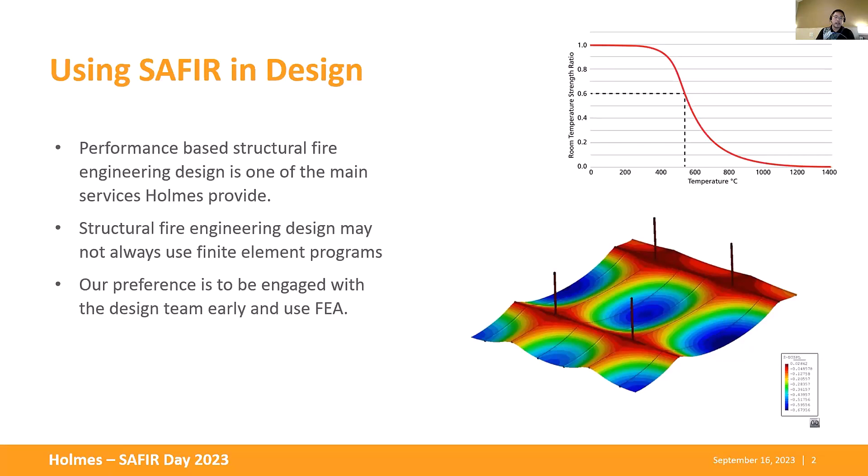But finite element analysis is something more specialized, and our preference is to be engaged with the design team early, so we can push for the finite element analysis.

The problem with using finite element analysis in design is we need to make sure the results can be reproduced. That's not only about getting the input data and running the simulation again—it's using the same parameters in the design so someone else can reproduce the results, which means the computer package needs to be robustly reviewed, peer reviewed, with enough evidence to back it up. Also, the package cannot be too easy to manipulate.

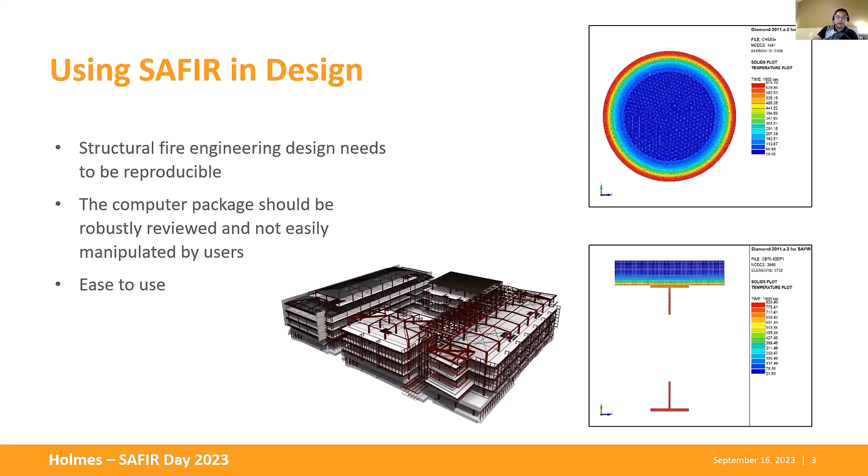There are quite a few programs out there that people can play with, like the thermal relationship, mechanical relationship in the background, and those tend to be quite difficult to peer review. If things are difficult to peer review, it will be difficult to use in design to get approval. One reason we prefer SAFIR over other programs is it's reasonably easy to use for finite element analysis. Most people here would agree SAFIR is the easier program to use, so I don't really have to sell that too much.

What I'm going to present is one of the design examples we have in New Zealand—the Dunedin Hospital, which is down south. There are two buildings, one inpatient and one outpatient. The inpatient building we are still doing analysis on at the moment. The outpatient building has been completed in terms of design and council approval. The building will be suitable to use after major disasters.

In New Zealand, that means major earthquake. This hospital is protected by a sprinkler system with dual water supplies. Under the New Zealand Building Code, even with dual water supply and basically all passive fire protection systems in place, you still have to consider what if the sprinkler system fails. That's where we came in, and the structure design is with a steel moment frame acting compositely with 170 millimeter concrete floor.

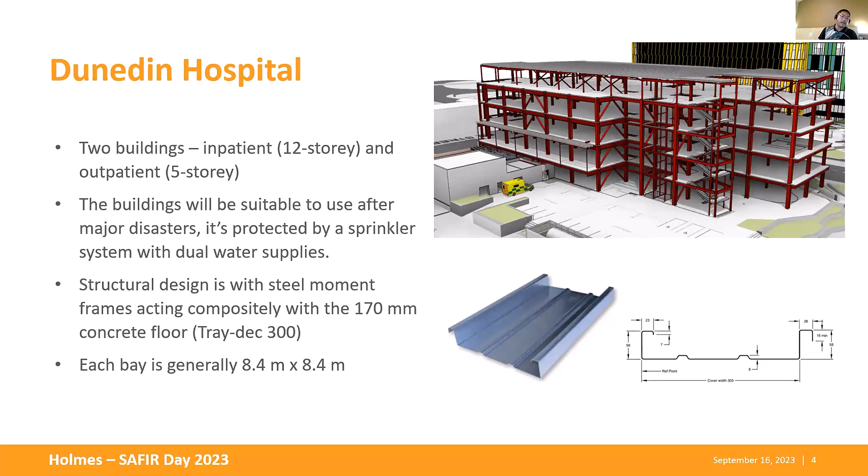The composite concrete floor uses a tray deck profile. It has a relatively flat bottom that touches the top flange quite nicely, so we won't really have a void between the top flange and the concrete. Each bay is 8.4 meters by 8.4 meters, so it's square.

For structural fire engineering design, we have to follow the same process as a fire engineering brief, like normal fire engineering design, to explain the design fire we choose. This way we can make sure, later—because running a simulation does take time—that everyone agrees the chosen design fires are representative. For hospitals, we need to think about the decay phase, so rather than just using the ISO fire, we look into the parametric fire.

The problem with parametric fire is, for example, scenario 1, which is the operation room—it doesn't have a lot of ventilation area, basically almost none. The parametric fire in the decay phase is going to be super long, which is actually quite unrealistic. The structural behavior in the decay phase is quite different from the heating phase, and that long decay phase is causing problems. But that is something we have to analyze and discuss further.

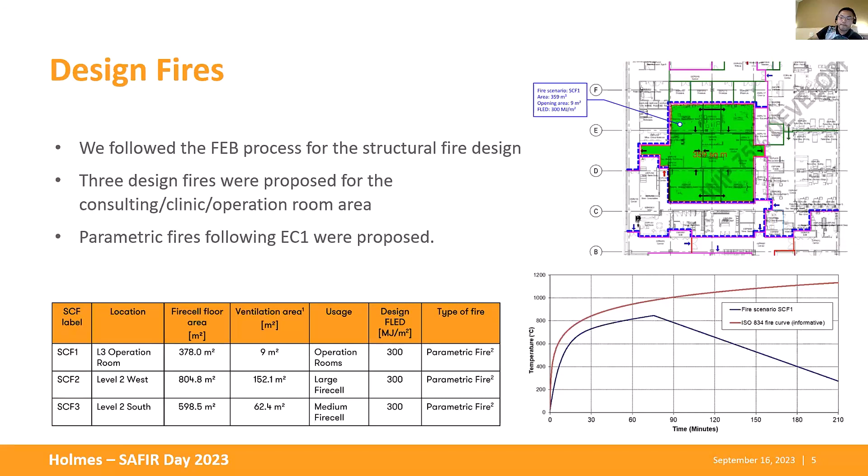The acceptance criteria - well, there's no hard restriction on the floor deflection. This took a lot of communication between us and other stakeholders, because many people don't appreciate that structural fire analysis, or when the floor deforms, happens very late into the fire, and is not really relevant to the life safety of people above the heated floor.

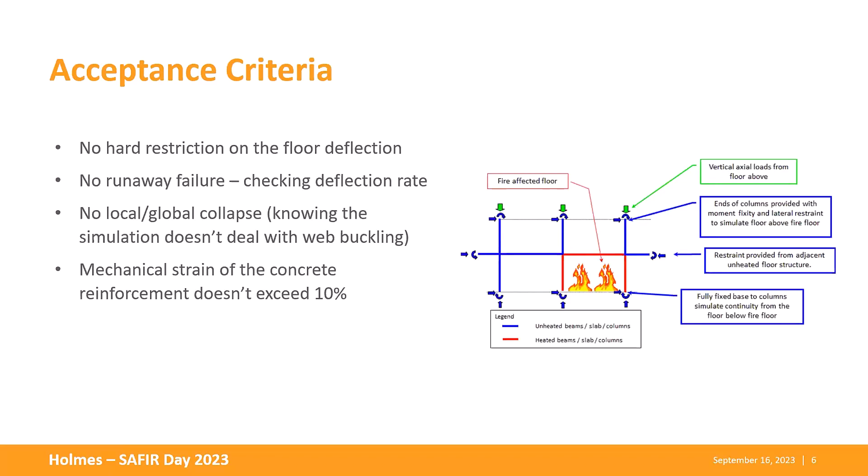So the deformation shape - we don't want the floor to collapse, but how the floor deforms has nothing to do with how people can get out from that floor. That's why we don't put a hard restriction on floor deflection, like whether it's L over 30 or L over 20. What we do need to worry about is runaway failure - we don't want local or global collapse. The mechanical strain of concrete reinforcement shouldn't exceed 10%, which is just to put some limitation on the simulation so it doesn't run indefinitely.

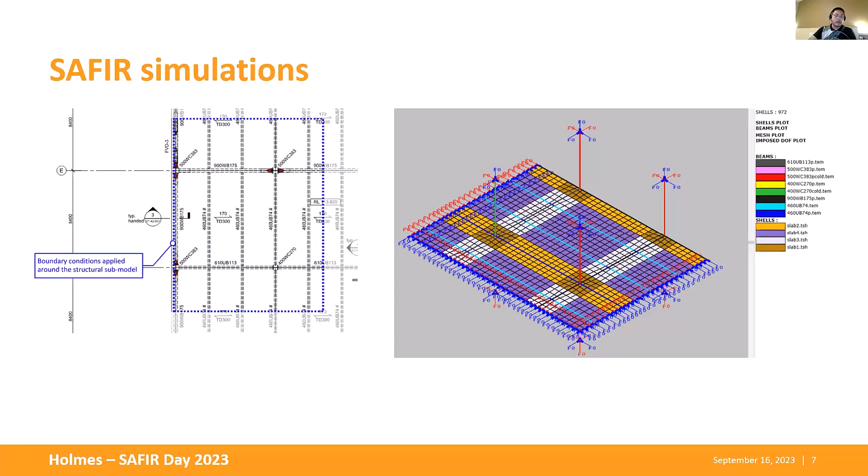This is the model we simulated, with different reinforcing bars producing different sections, and we picked a corner of the building to simulate. We did this thermal analysis for the primary beams, and also thermal analysis for the unprotected secondary beams, and thermal analysis of the shell element simulating the slab.

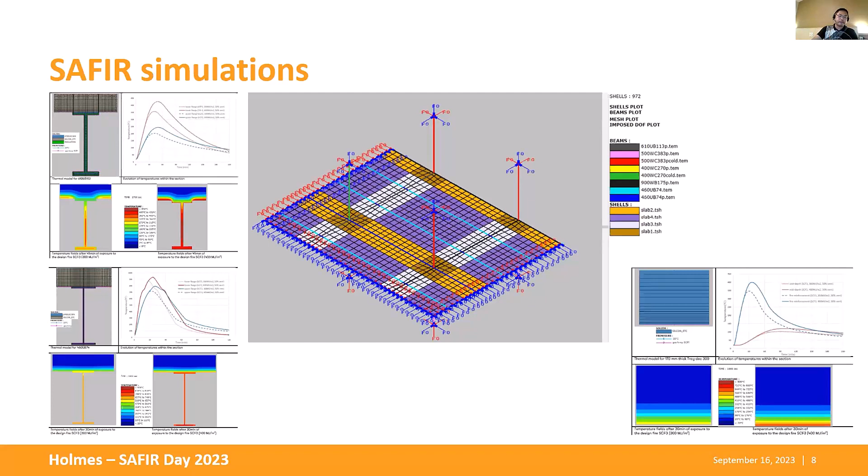The simulation results were, well, kind of as predicted. The maximum deflection happens when the temperature is high, and then it starts to come back a bit later.

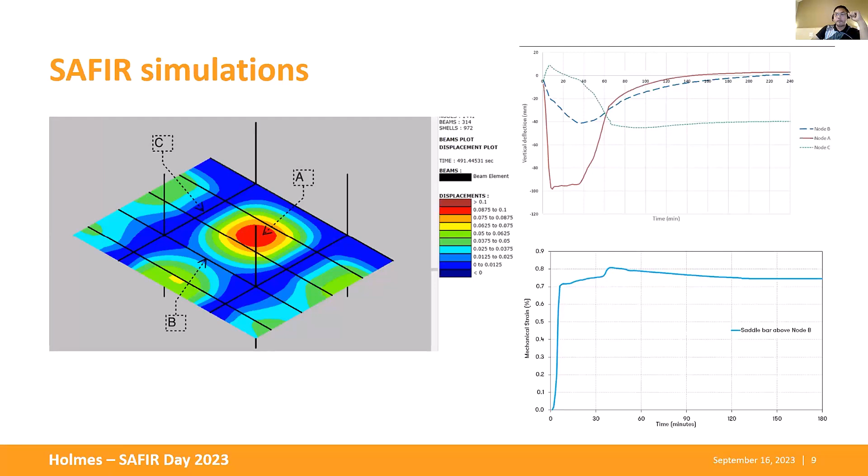Most of the secondary beams are allowed to be unprotected - that's what the client wants. Beams within 700 mil from the evacuation zone boundaries are protected, which is to appease the other stakeholders - we actually don't really need that. The primary beams and columns are protected. For all the performance structure design, we ask people to pay special attention to the connection, so the shear force can be passed into the concrete infill of the columns.

That's the example I'm giving for the design stage, and I'm passing to Linus to talk about the more interesting side about forensic investigation.

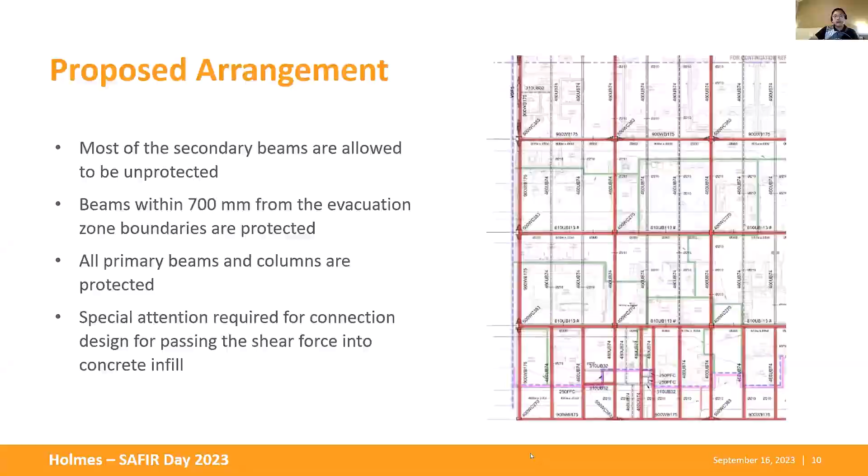Hi everyone, can you hear me? Yes Linus, thank you. Hang on - why is it not sharing? There, sharing again, sorry, I'm not used to sharing screen. Why is it not sharing? Can you see my presentation? You are sharing, you are sharing. Yes, okay, can you see my presentation?

Cool, good. So today I'm going to talk about the post-fire investigation and analysis of the New Zealand International Convention Centre fire. Some of you might have heard of this before, so apologies if it feels like a repeat, but anyway I'm just going to talk about it and try to compress it into 15 minutes.

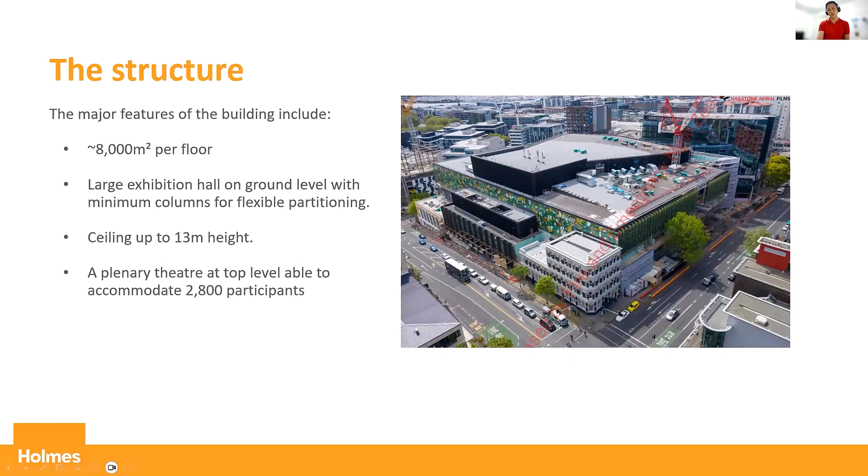The building I'm going to talk about was approaching completion in Auckland, New Zealand. This is roughly what it looks like - several stories, and each floor is about 8,000 square meters. Inside, the building was going to be used for a large exhibition hall, and here you have a theater with a ceiling height of about 13 meters, which can accommodate up to 2,800 people. Like I said, it was nearing completion, but a fire broke out in October 2019.

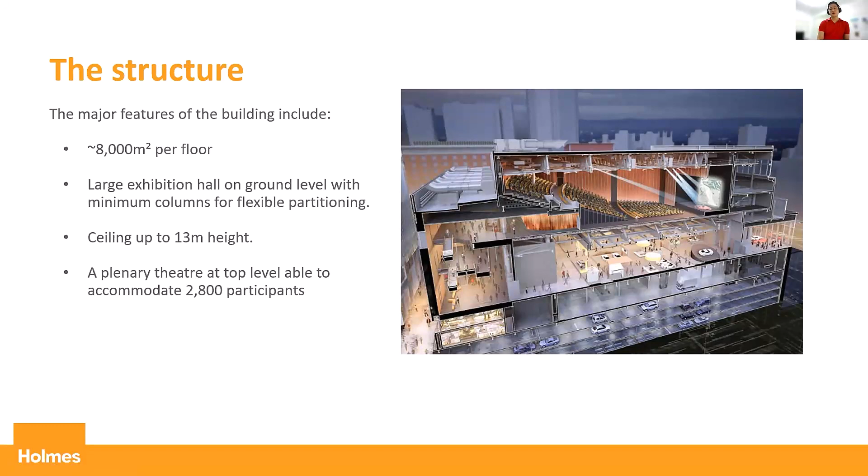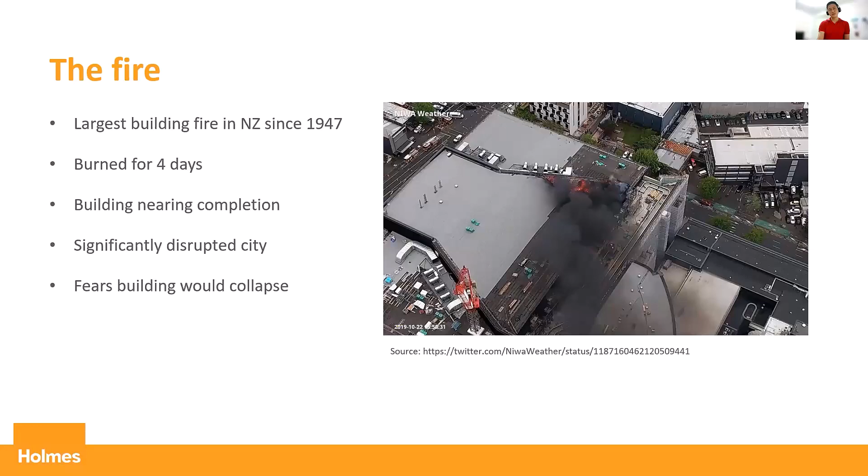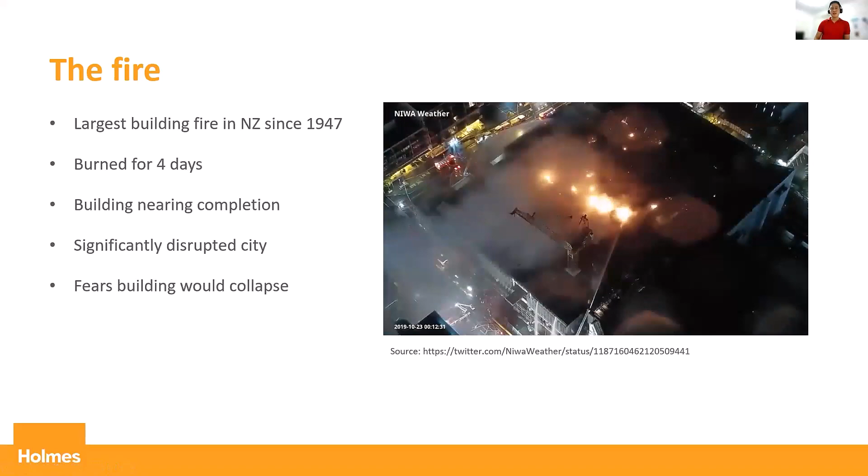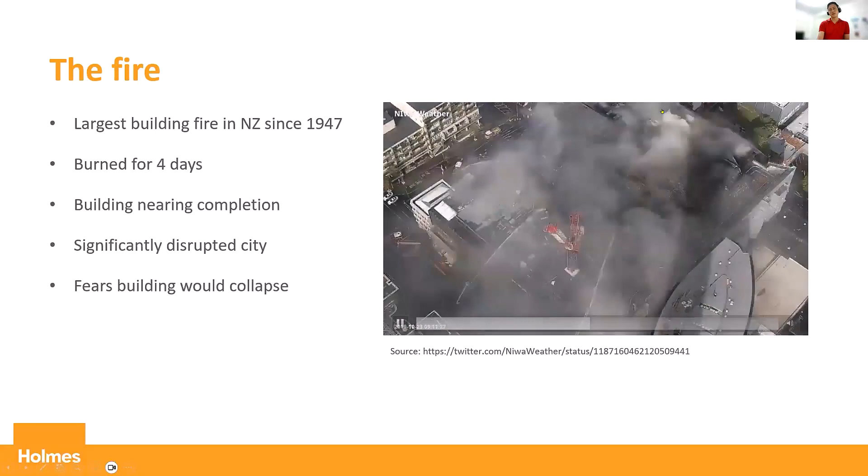This is quite a few years now. What you can see is a time lapse - conveniently there was a webcam camera located on a crane, or actually the next door building, which captured it. I'll try to run this. As you can see, it started from one side and spread across the roof, and burned for nearly 4 days before it was fully extinguished, though the main part of the fire was about 2 days. It went from the upper roof and spread to the lower roof, and people thought it had gone away, but then for some reason it starts again on the other side of the roof.

So the firefighters had a tough time putting out the fire because there were concerns about approaching it from the underside, so they had to fight it from the outside, from the street level. So anyway, that's the video.

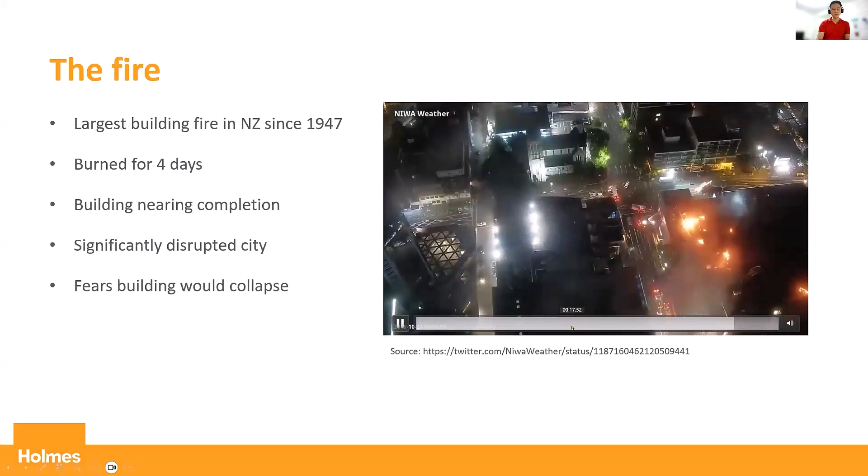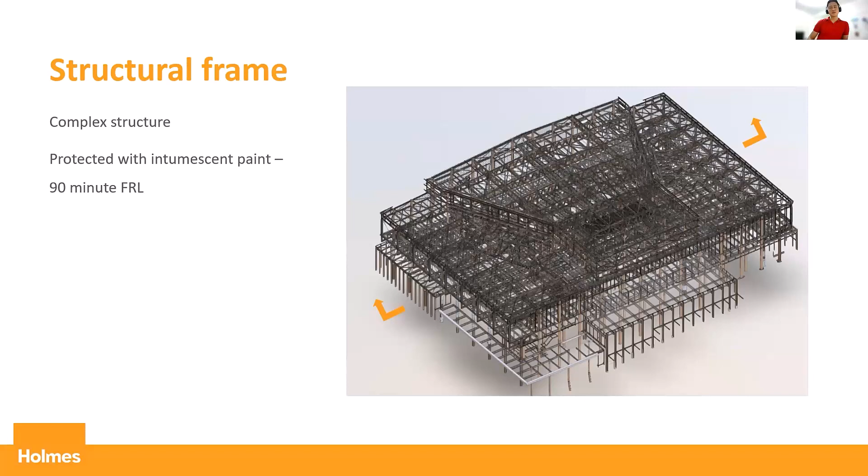So a bit about the structural system for which we did this investigation. It's a fairly complex steel frame structure, designed to resist not only gravity loads but also earthquake loading. Coincidentally, most of the steel frame structure, including the long span trusses, were protected with intumescent paint to a 90-minute fire rating.

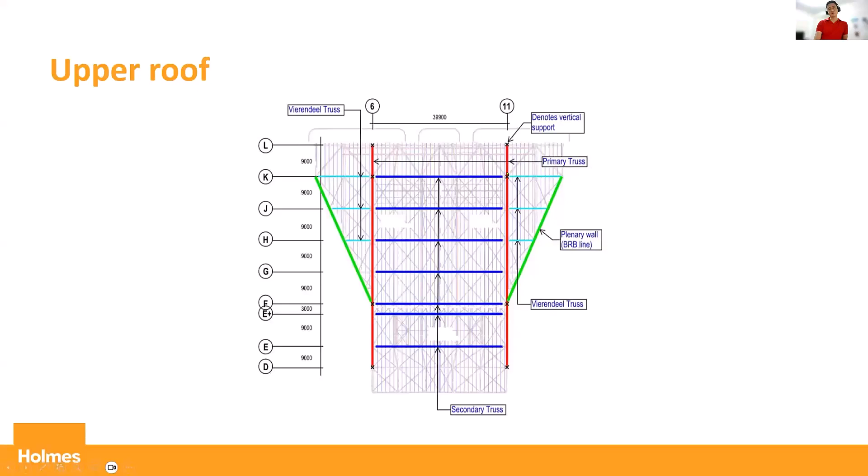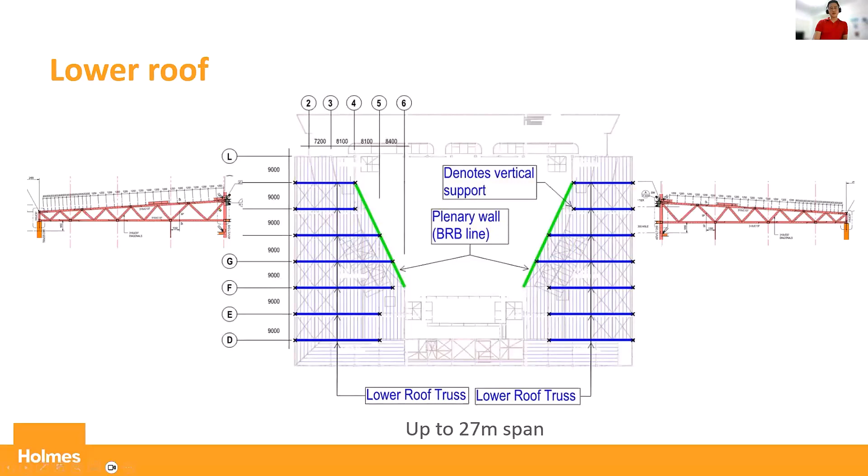There's two parts to the structure: the upper roof and the lower roof. The upper roof has blue, which is the secondary trusses, spanning about 40 meters between the red ones, which are the primary trusses. The columns are over here. The primary truss spans about 36 meters this way, and the main span is about 40 meters this way in blue. On the lower roof, the trusses span up to about 27 meters.

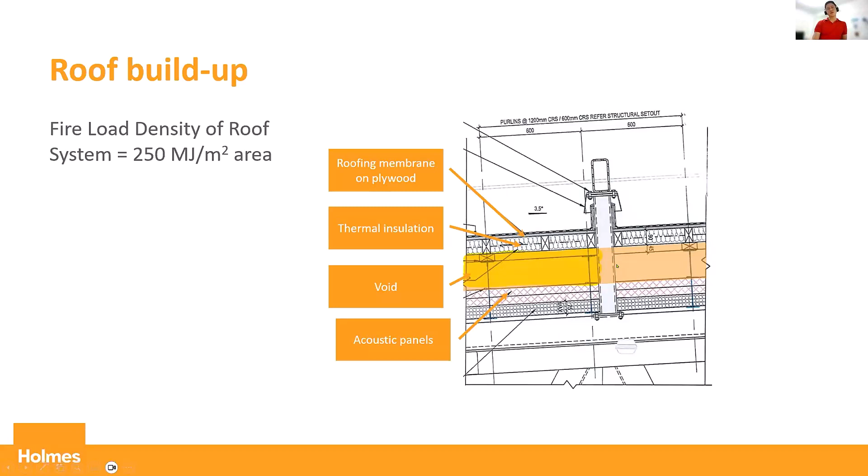What happened during the fire was that in the composition of the roof, the roofing membrane consists of a combustible layer on plywood, then thermal insulation, then a void, and acoustic panels. Someone accidentally left the heating torch when they were trying to build up the roof membrane, and it set the plywood on fire. The thermal insulation caught fire, air passed through the void, and it went through the whole roof layer. There were also prevailing winds that caused the fire to spread everywhere.

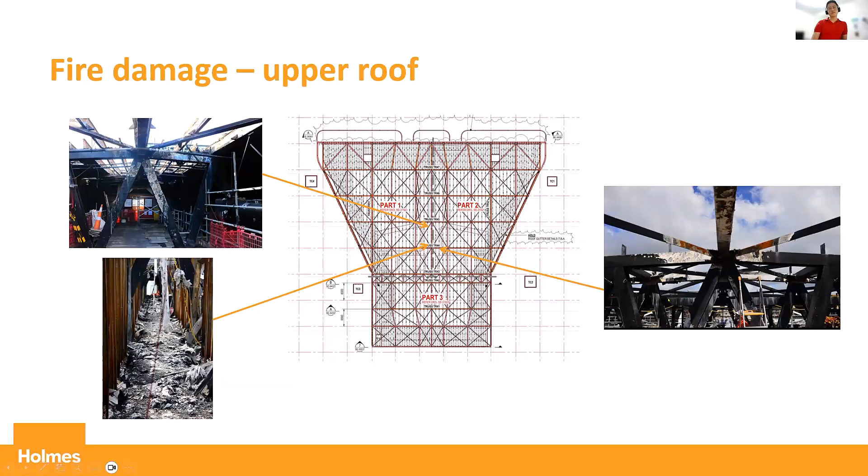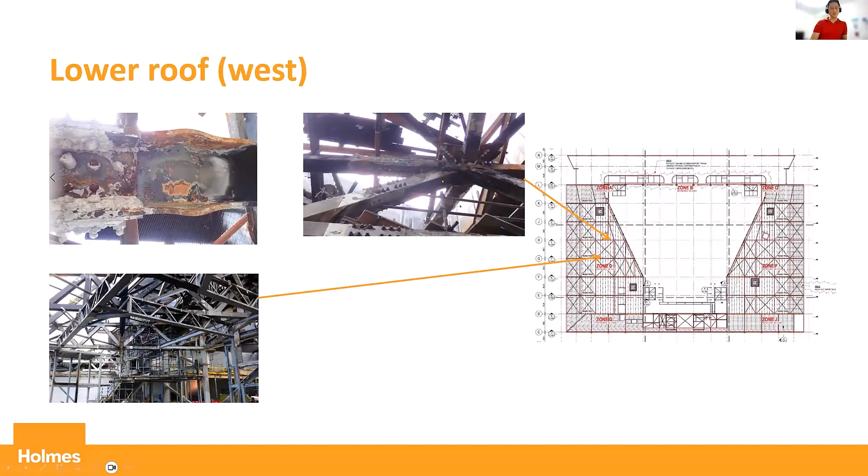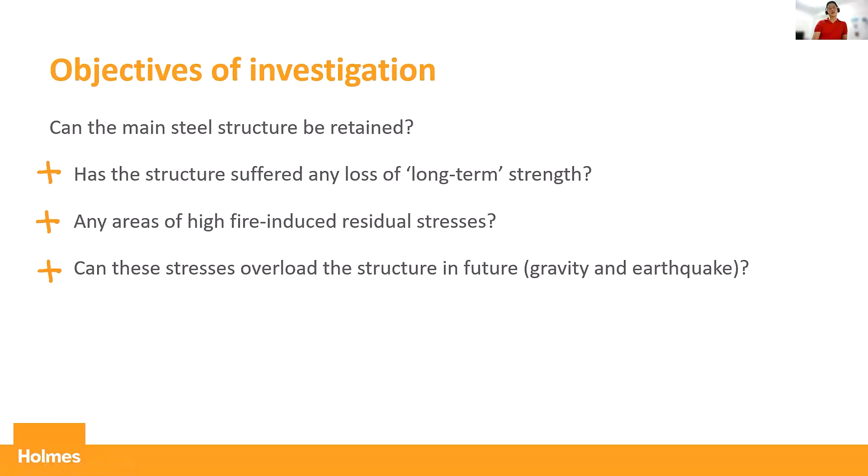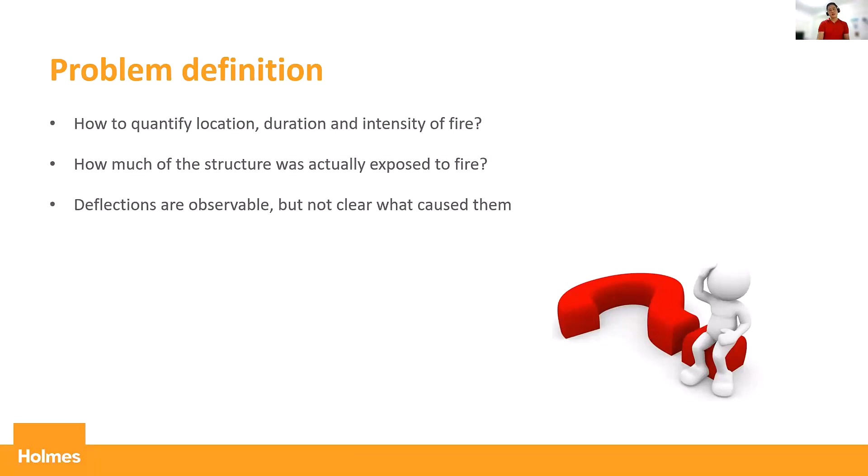So in terms of our investigation, we had to work out where the fire was, how long it burned, and its intensity, and how much of the structure was exposed to the fire. While there were some deflections, it wasn't clear at the time what caused them. Also, the challenge was that any thermally induced residual stresses due to the fire were not easily visible.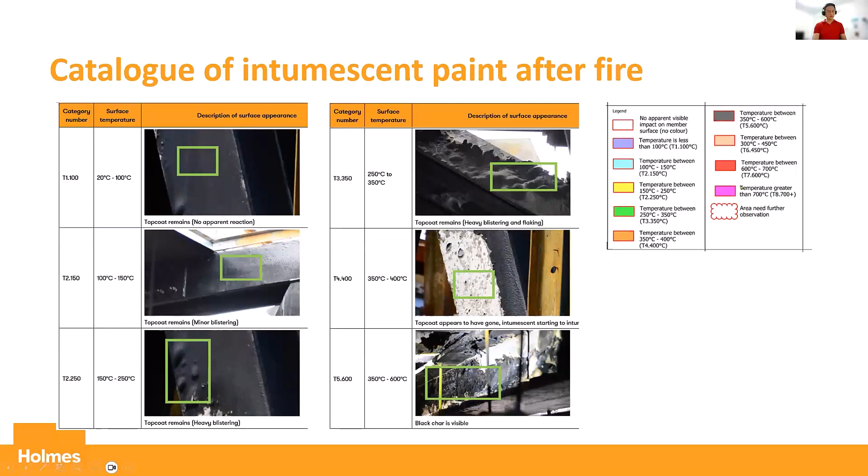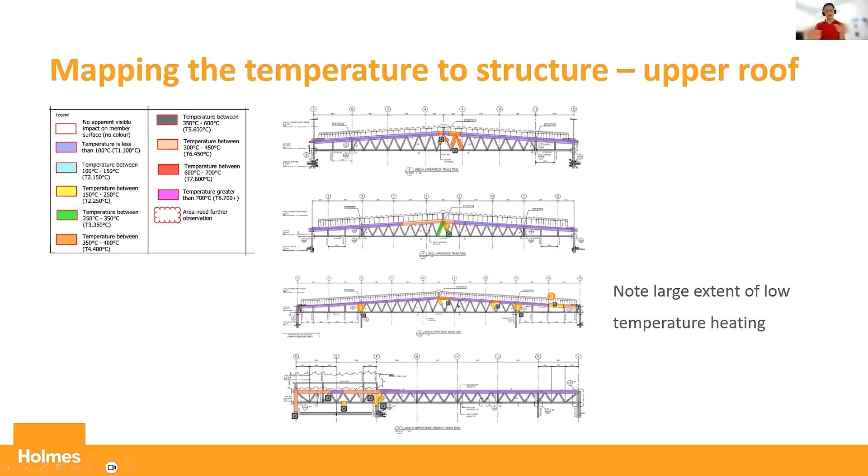We then did a whole bunch of inspections throughout the building to work out where the heating was. Purple indicates low heating, and then there are different levels of heating, orange and so on, indicating areas of much higher heating. We did this for the whole roof structure, which took quite a bit of time, obviously.

The other thing was to work out when the fire was and where the fire was. So we mapped the heating progression of the structure across the building using the webcam video. Fundamentally, the fire started to move this way, from blue to green, purple, and so on, from the northwest to the northeast, and then down south.

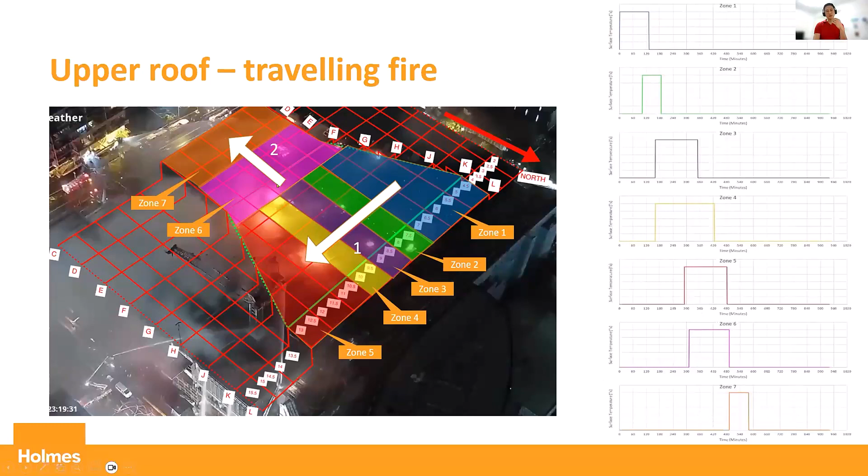So each of these regions from the CCTV footage, we could derive time-heating curves, very simple approximated curves, for each of the zones here: 1, 2, 3, 4, 5, 6, 7. And then we were able to define what the heating was.

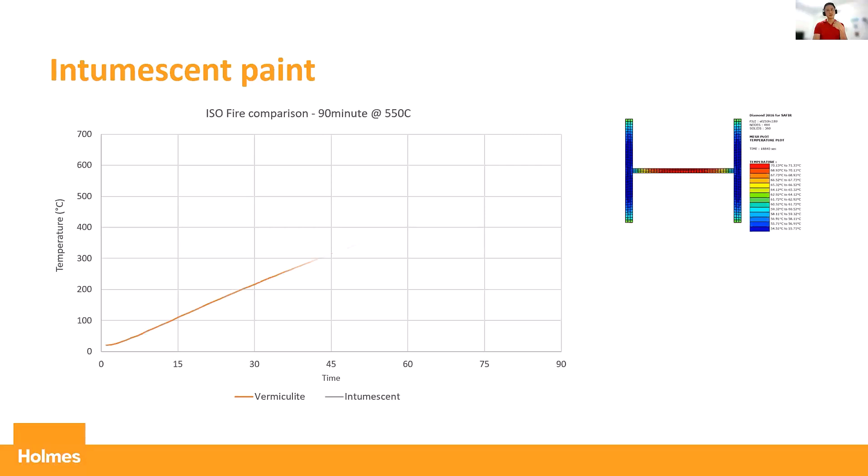One of the other things we thought we should model was the presence of the intumescent paint, which compared to vermiculite fire spray looks a bit like this. Intumescent paint has got this bilinear curve. We did a simple literature survey and worked out that the temperature is going to activate the intumescent paint a bit like this, to define a limiting temperature. If someone protects a bit of steel to a certain limiting temperature, you get a characteristic curve that looks a bit like this. So we tried to model it this way.

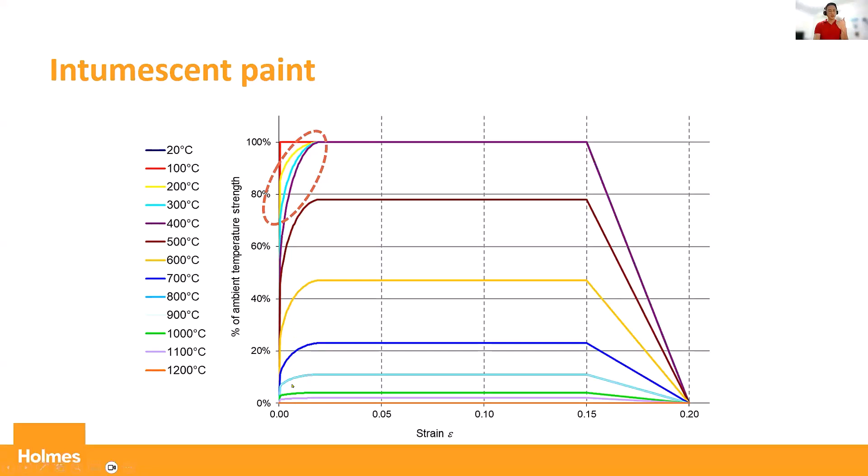The reason we modeled it this way was we wanted to capture the phenomena in the early heating zone as well, because of the influence of residual strains, particularly when you look at the stress-strain curve of steel. At 200, 300, 400 degrees Celsius, you start to get some nonlinear behavior, so when you have heating, cooling, and unloading, you get some residual strains. We wanted to make sure we picked some of that up as well.

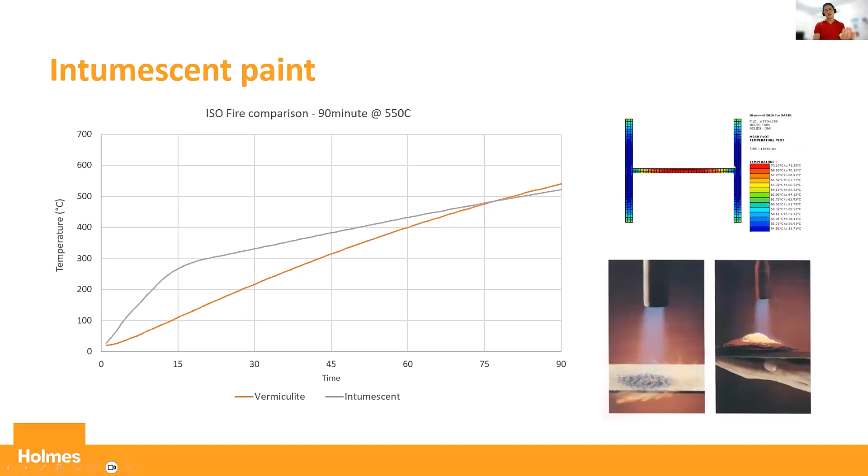So backtracking a bit: we took all the heat transfer analysis for every single different type of structural element, applying the different heating curves, temperature-time curves, and zones. We constructed a structural model that looks a bit like this, and we ran it to see how the structure responds.

If you look at the deflection at the top of the truss, it looks a bit like this orange curve here. This is the net deflection attributed to fire, so we cancel out the gravity deflection and only show the net deflections. The structure deflects upwards—this is vertical displacement as a function of time. It displaces up and then comes back down after cooling. So there's a little bit of net deflection, but very hard to see with the eye. Fundamentally, the structure is pretty much undeformed, at least over here.

In other areas, we were also able to predict the deformations, which were quite consistent with what we saw on site.

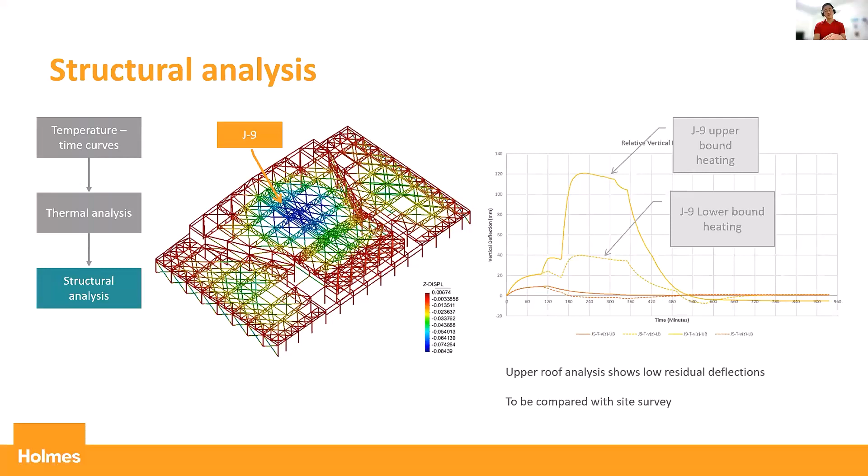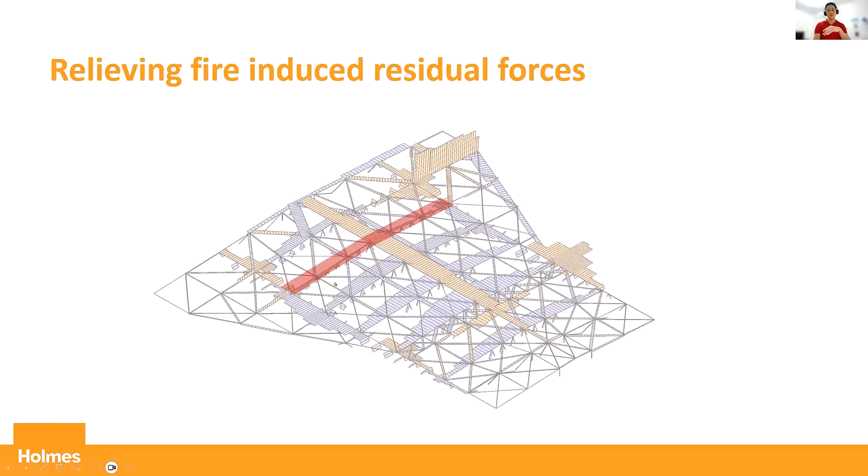One of the things I said early on was that we were trying to predict where the residual forces are. So this is the plot of the axial forces after the fire at the top chords of the roof truss—blue is compression, yellow is tension. In theory, most of the top chord should be in compression, but if you look at this one here, it's actually strangely in tension.

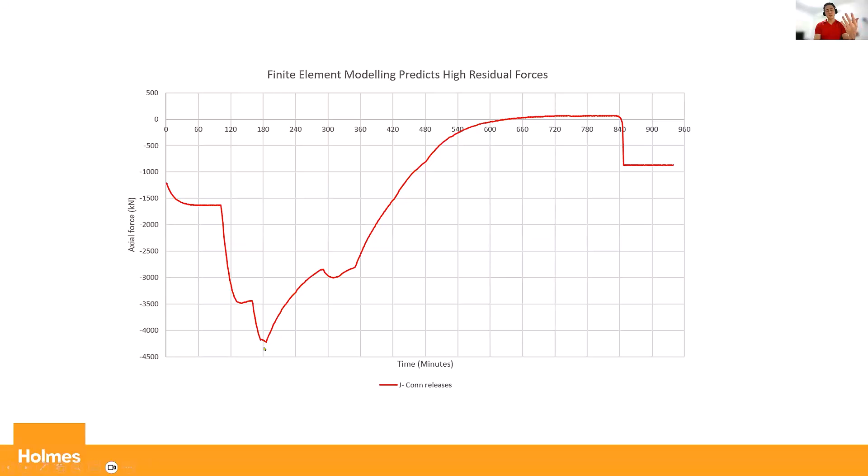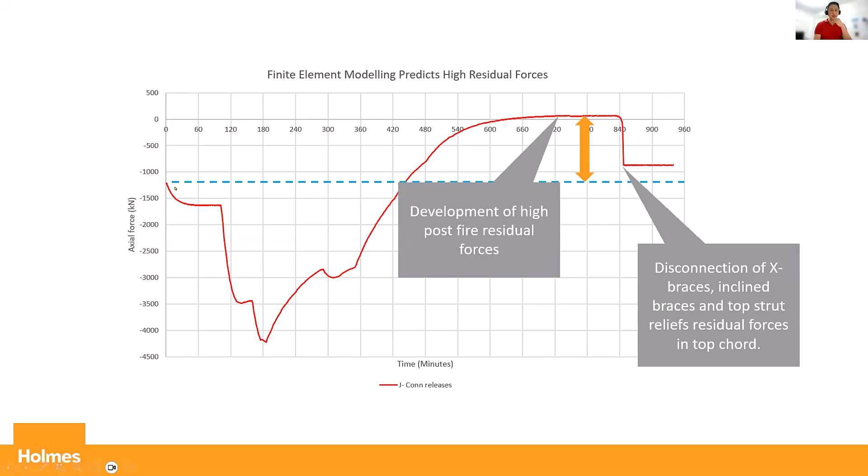If you look at the axial force at the start of the fire, it is compression, which is correct. As the fire comes along and gets hotter, the compression forces increase. But as it cools and decays, you find there's actually a difference, forming some residual forces in the top chord. We found that by disconnecting numerically the braces, we could actually relieve some of the residual forces and bring it back closer to what it should be before the fire. So all that was quite useful.

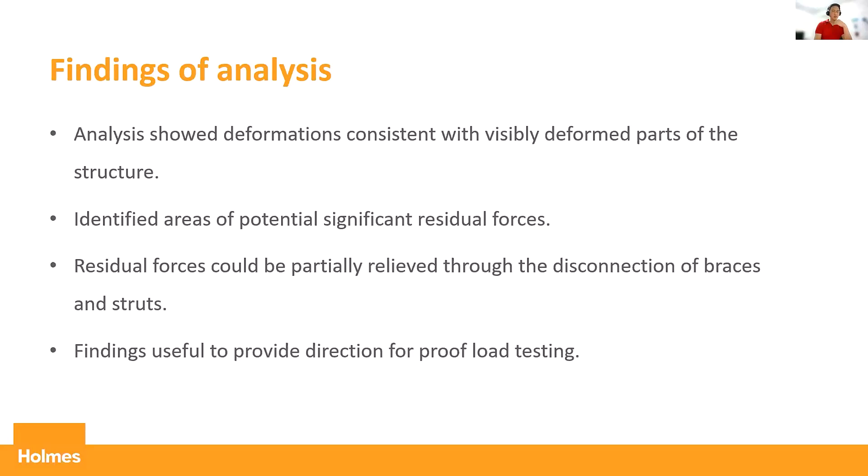In summary, we found all this information was very useful for the team in terms of rehabilitation of the structure. Fundamentally, what they ended up doing was disconnecting most of the structure, bringing it offsite, and repainting it.

I'll just show one last slide here, which is they did some proof load testing. This isn't SAFIR related, but they set up a rig—you can see these are tension rods here. They loaded some of these trusses to ultimate limit state loading to check that the structure performs elastically, which it did. This gave confidence to the design team that the structure, even the worst heated one, if they replaced one or two members, could still perform pretty elastically and take the ultimate limit state loading.

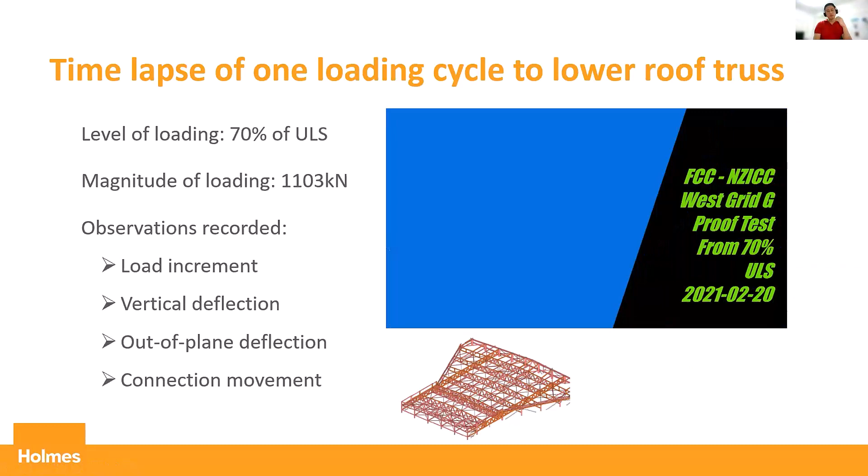Yeah, so look, I'm going to conclude my presentation here. Thank you for your time. Let me know if you have any questions.

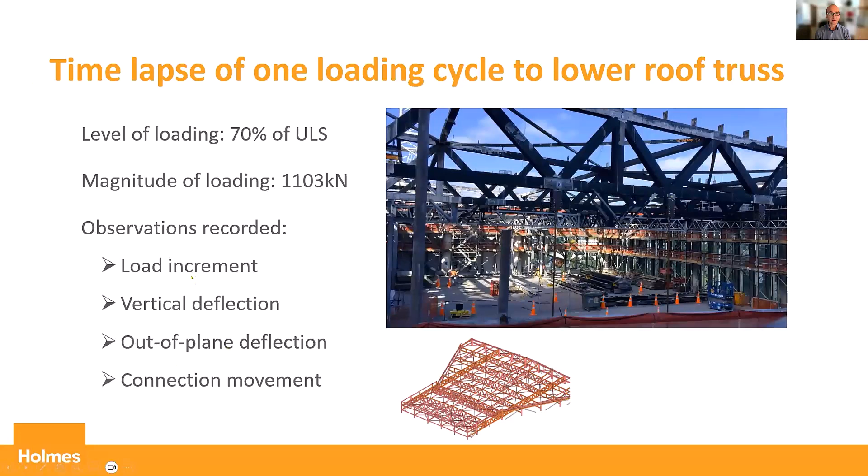So first one is for Jeremy. Can you please elaborate a little bit on the mechanical boundary conditions in your design presentation on the hospital, especially if there is lateral restraints provided by the cold parts when you were looking at the fire scenarios in the different compartments? Right, so we didn't really model the cold part.

We simulated the entire thing being, well, the whole slab being heated up by the design fire, and the boundary condition is done. We also modeled it to half of next bay. So basically the boundary condition is for symmetry. You have to restrict the lateral movement anyway, and that's what we did. So it wasn't really considering the cold part providing restriction, but more to just simulate the symmetry.

Very good, thank you. Linus, a few questions on your part as well. There were a couple of questions on the intumescent coating. So you presented a curve with the temperature, but can you elaborate a little bit on how you treated that in the thermal model, please?

Yeah, sure. We looked at the different thermal conductivities for different temperatures. So at low temperatures up to about 300 degrees Celsius, we use a high thermal conductivity. And then once we got to past 300 degrees Celsius, we use a low thermal conductivity to represent the insulative effect of the expansion of the intumescent paint.

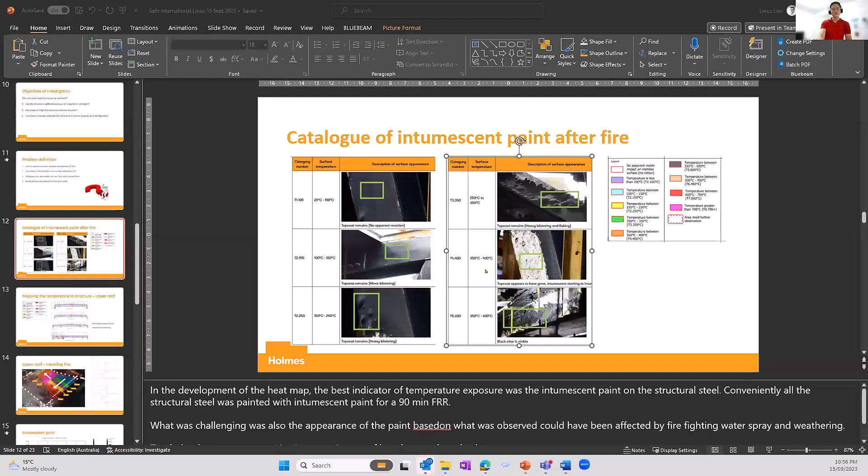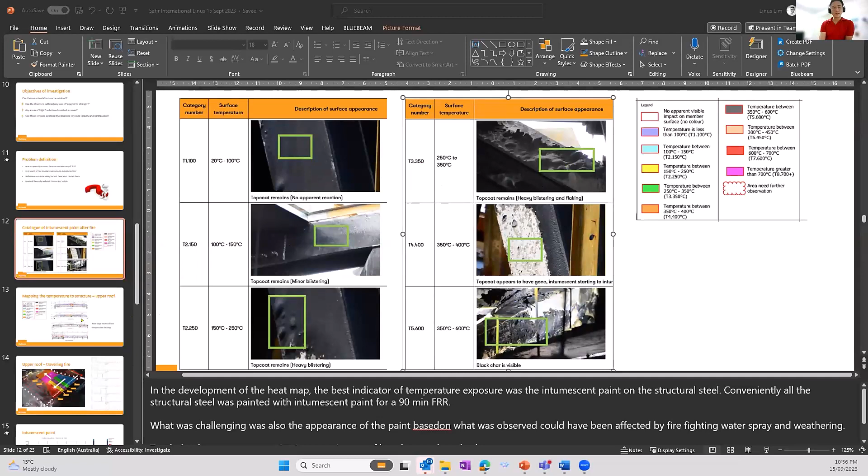Might be easier to explain. So for instance, over here, this one would have a maximum of 350 degrees Celsius. So if we find from our heat map that you've got a member exposed to that temperature, then you adjust the heating so that it would go only up to a maximum of 350 degrees Celsius.

And then this one here, it'll go a bit hotter - that would be 400 degrees Celsius. It'll go up only to a maximum of 400 degrees Celsius. So that's how we define the maximum temperature.

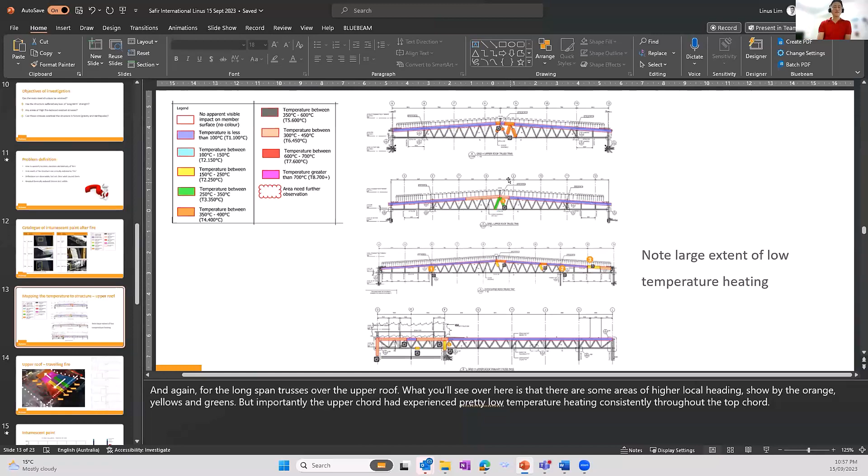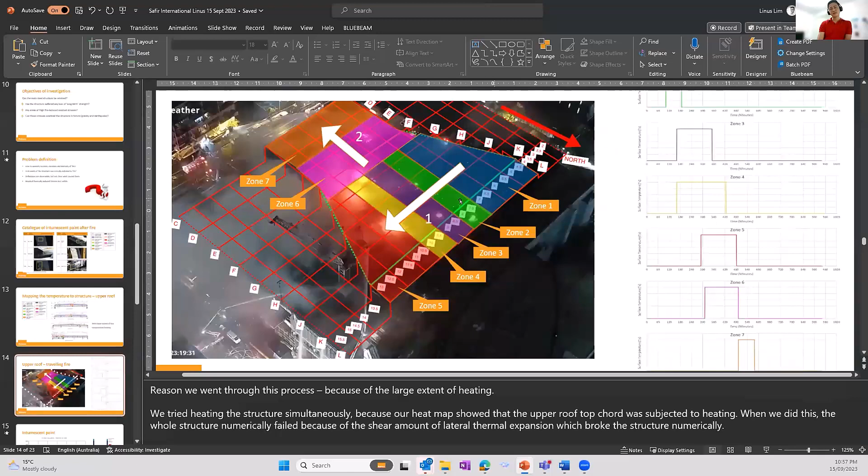And then the time is based on what we observe from the CCTV footage from the top. So in this zone, say the green zone, it would follow the heating that follows this time here. From what we observe from time zero, it will go up and then flat line. So if it was 400 degrees, that member would be heated to 400 degrees and come down again after we see the fire decay. If you've got another member in this zone heated to say 600 degrees, it will go up to 600 degrees and come down again.

So every single member in this zone will have its own curve. There are a lot of curves to be applied to all those members, and all the members here could be different. So it was quite tedious.

Very impressive, thank you. I'm assuming that took more than a couple of weeks working on that. No, it took longer than a couple of weeks.

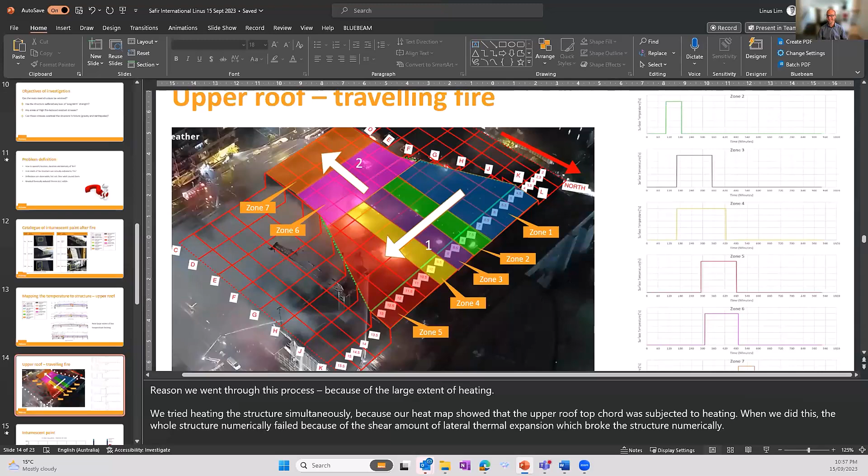There was the last question, and Jeremy already answered in the chat, but I'm going to read it for everyone. The question was about the behavior laws, the material laws used in New Zealand, and for the design example, whether they use thermal and mechanical models from the Eurocode or others. Jeremy, thanks for answering that.

New Zealand standards also use the same material models as the Eurocode. To a large extent, that's the case also in the United States. For concrete and steel, it's compatible. So the Eurocode models, which are pre-embedded in SAFIR, were used also in that design example.

Very good, thank you. So with that - oh sorry, okay, that's just the last question, and I'll ask for a brief answer. But that's a good one.

It's interesting - for Linus, do you think there was an effect of rapid cooling from the firefighters on the residual mechanical properties of steel? Maybe even beyond the modeling of SAFIR. Was that something that was discussed or of concern? Or the effects of water? I know it was very significant in the repair, right?

Yeah, there was certainly a lot of concern about that, but I can assure you there wasn't that much. The cooling of the steel wasn't that quick, only because the fire brigades just couldn't get to it fast enough, because a lot of the steel was shielded by the roof itself. There's a layer of the roof, and then you've got the steel under the roof, so the water from the firefighters couldn't get to the structural steel that easily.